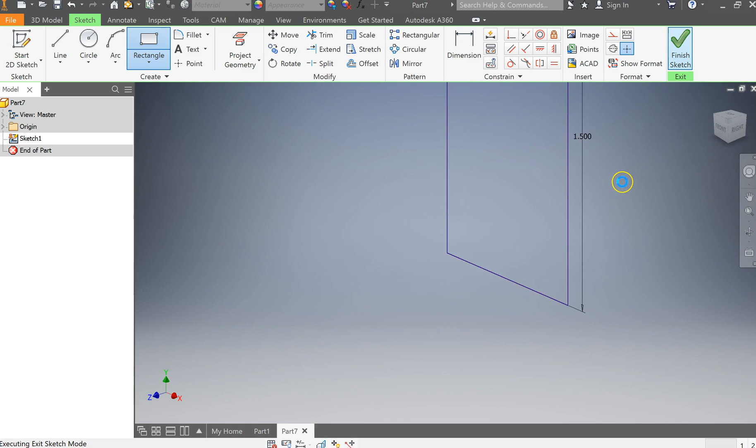I click on my Start Sketch, grab my front plane, and now I'm going to create a rectangle. I just want to give you a heads up, this is a pretty weird part. I'm going to click the green here, get the green dot, click, and then I'm going to start my dimensions here, 0.75 by 1.5, and click Finish Sketch, and then, oh, I made a mistake.

I just realized. So instead of starting over, I can double click on the sketch, and I can double click on the dimension, and make this 0.75 and make this 1.5. There, now that's correct. And I click Finish Sketch.

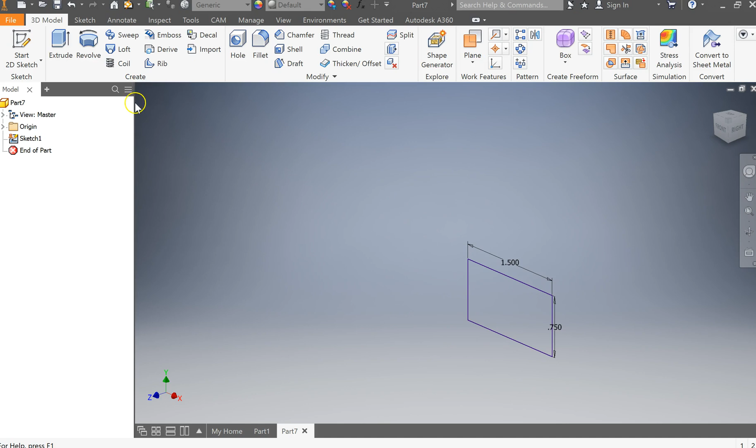I'm going to go ahead and extrude this back 0.75. Now we're going to be adding some sketches on different surfaces, so make sure you follow along closely. I'm going to click on Start Sketch.

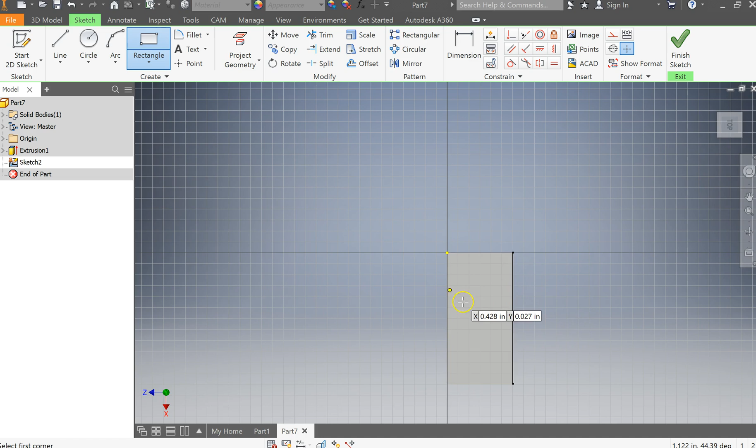I'm going to click on the top here, and I'm going to get my rectangle tool. Notice how it's not really giving me the green dot except for there. So what I need to do is hover over to the center, there's my green dot, and you should see a dashed line right there. That's my center point. So I'm going to click here, and I'm going to drag down here.

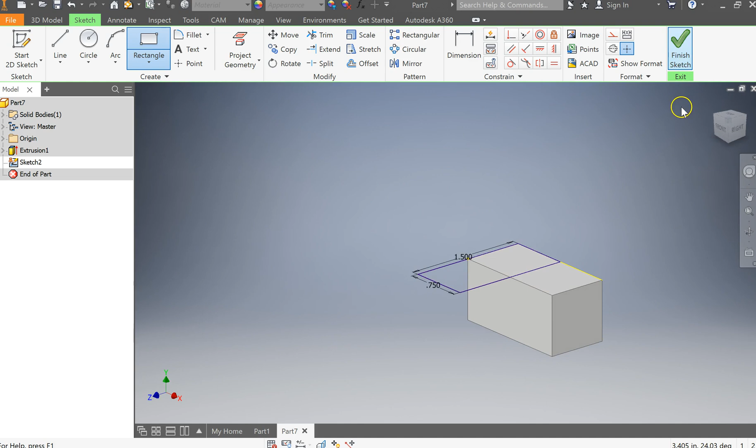And I'm going to make this 0.75, tab, by 1.5, enter. And I'm going to click Finish Sketch. Now I can extrude up 0.75.

Alright, so that's the first two parts of this part. It's kind of a weird shape, like I said. So now I'm going to click on Start Sketch. I'm going to grab the top of this here, and I'm going to click my rectangle tool.

Let's see, I'm going to start right here. And, no. Actually, let me look at this. Yeah, okay, sorry. So I'm going to click right here. There's my green. And I'm going to click this way.

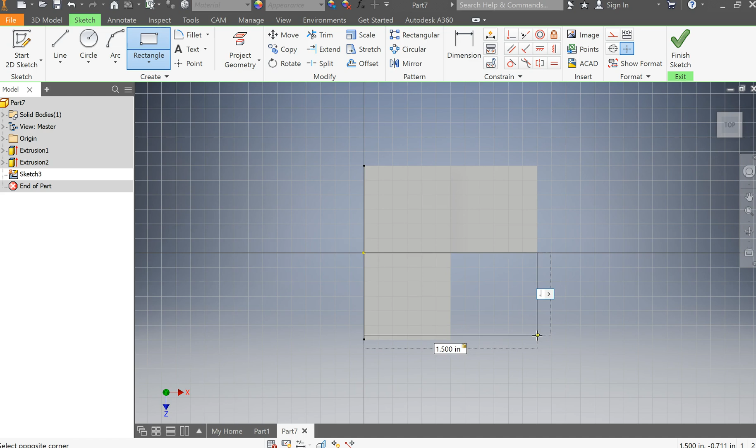It kind of already wants to snap in place, but if you want to change it, obviously you can. It's going to be 1.5 by 0.75, and click Finish Sketch.

Now, make sure you're paying attention to my orientations when I flip things around, and make sure you're in the same place. You know, you're not like this if I'm like this, because it'll make a difference when you put your dimensions in. How you're putting them in is dependent on what orientation I'm in. So you need to make sure you're following along exactly as I'm doing it.

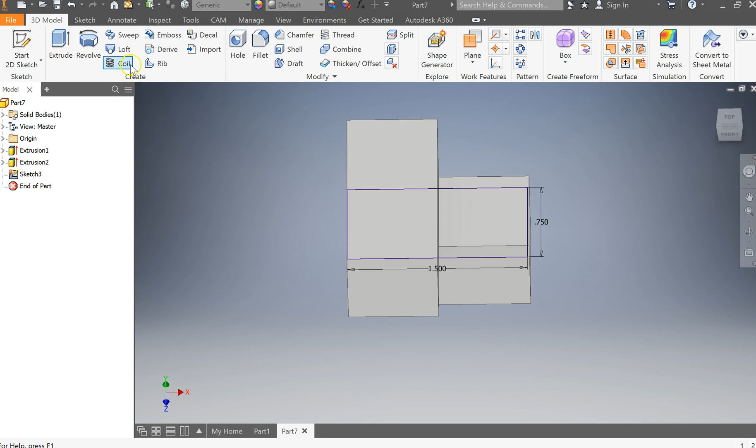Alright, so let's take a look here. I'm going to click Extrude. That's going to come up 0.75. And there's my last shape of my puzzle.

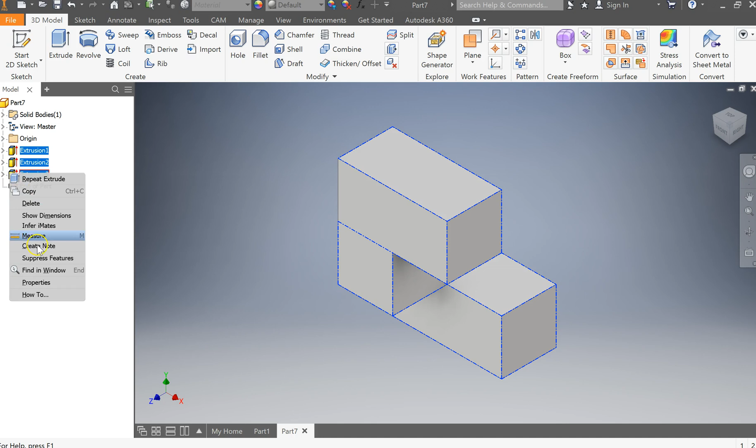So I need to click on the first one. I hold my Shift button down on my keyboard. I click the second one. I click the third one. I can let go of my Shift key. And now I'm going to right click and go to Properties. I'm going to come down to Smooth. Let's make it purple. I click OK.

So now I'm going to save this. And this is the final piece to my PuzzleCube project. So, 5-purple, save, and that's it. I'm good with that one.